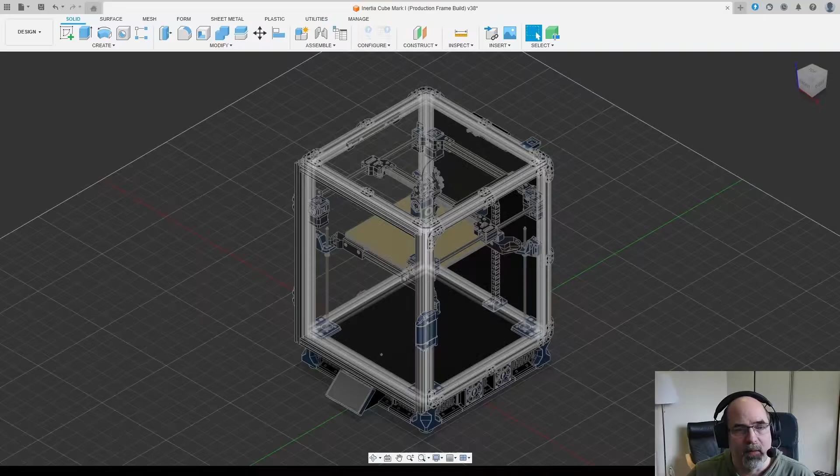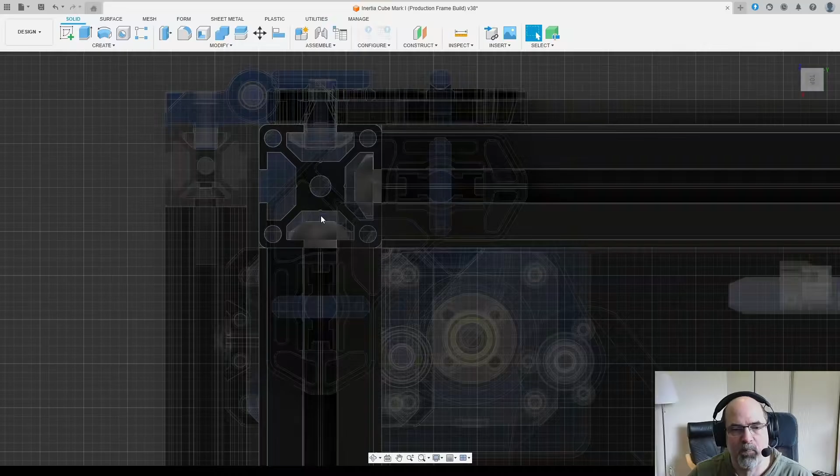Let's have a look at the frame. So for the frame, we're leveraging 30-30 extrusions for the external frame. The 30-30 extrusions give us lots of space around the blind joints to route wires down the extrusion slots. And if you go down the vertical extrusions, you get to run wires from the very top of the printer all the way down to the very bottom into the electronics bay. So you can get wires all the way down by running them through this extrusion slot.

And this gap here is all empty space. So there's room for at least 5, 6, I think I've run as many as 8 wires in that space if they're small enough gauges. Running wires in the extrusion slots is very nice from a visibility perspective. You can easily hide all the wires behind some extrusion slot covers.

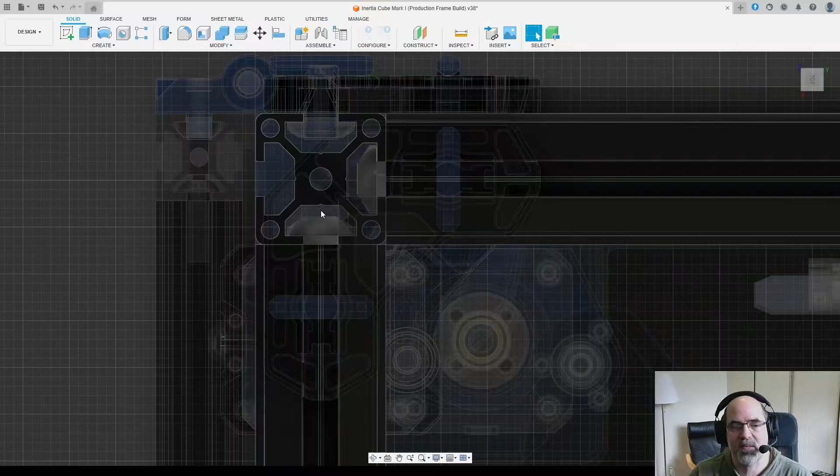However, it might not be optimal from a serviceability perspective in case you're constantly fiddling with your printer or rewiring things, or in case you have to service it for something later on. Admittedly, that's a bit of a trade-off. So although I will be routing my wires through the extrusion slots, you do whatever makes sense to you. We will have alternative wiring paths that you can leverage instead if this isn't something you want to go through.

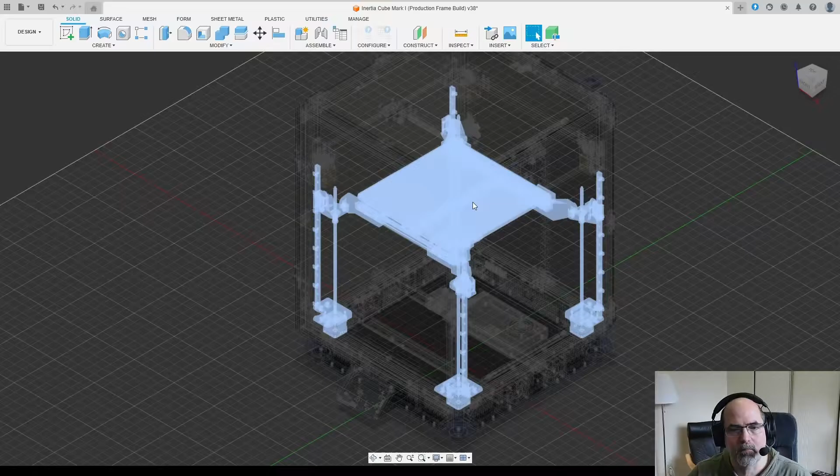The Z-axis, we have a few different things going on here. So the Z-axis is an example of a component where we have, let me just try and get the right view here. We have these fixed parts on the outside, so the lead screw motors. We're leveraging 4 lead screw motors in each of the corners to provide a quad gantry level bed leveling algorithm. And so the lead screw motors are attached via Z-joints.

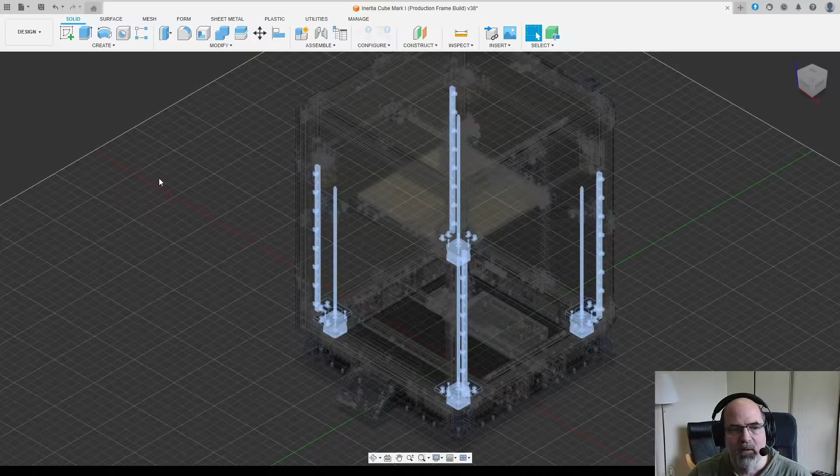The CAD is organized such that if there are static parts that don't move relative to the frame, then they are in a static parts folder, and kind of all of the assemblies from there. In each of the different sections, you'll see non-printed, so that would be fasteners, hardware you'd have to buy, such as the motors themselves, fans, electronics, et cetera, and then printed. So printed is all of the plastic parts that you'll print on your printer in order to finish the build. So you can quickly go through the CAD and look at all the printed folders in each of the sections, and they could be nested down the tree depending on how this is organized.

And then when we look at the printed parts folder, let me just give another example here with the monolithic gantry. There's a few things about parts that you might want to know. This is a bad example, but if there is an X at the end of the part name with a number at the end, that means print that part that many times. So X4 would be print 4 copies of that part.

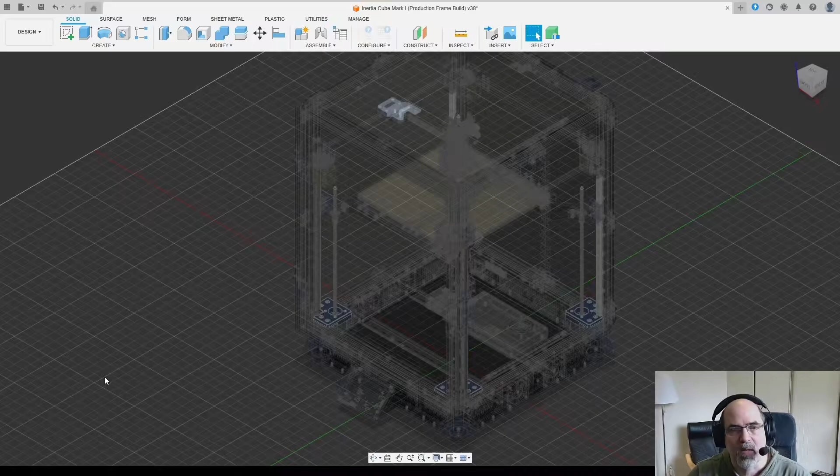If there is a D in parenthesis at the start of the part name, that tells you that the part is designed with dual color printing in mind. If you have access to a dual color printer and you want to export it and print it in dual colors in your slicer, then you can absolutely do that. If you don't or don't want to, you can obviously export it and print it as a single color part. That is fine, but there is, in this example, a logo that is hard to see in this view. Let me see, there we go, I can pull it up that way.

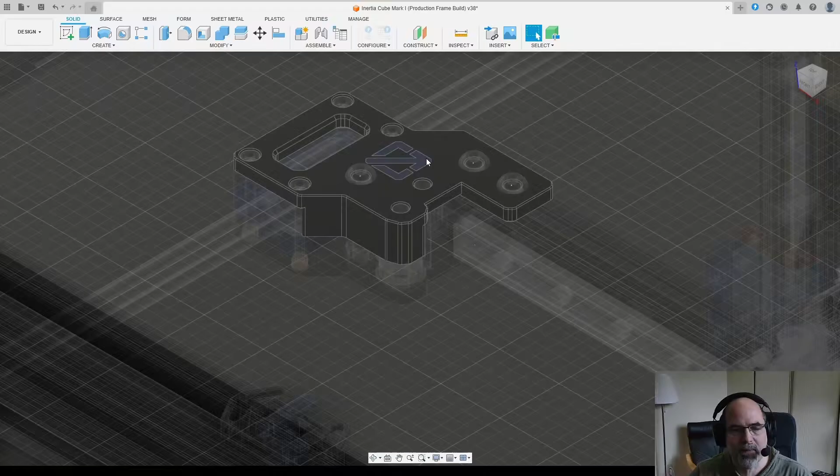So this blue logo is our Inertia design logo. The arrow faces up and to the right. And so that logo is in blue on the black background part. Our design choice for color scheme is black is the primary color and blue is the accent color. Obviously, you do what you like. My personal printer is my traditional purple and sky blue color theme, so I'm going to vary from this, but this is the model and color scheme that we've gone for as a team.

Where you see a printed part that has an A in parenthesis, then that part is intended to be printed in the accent color, so just a single color part, but in the accent color rather than the primary color. And otherwise, if the part name does not have anything in parenthesis, then print it in the primary color.

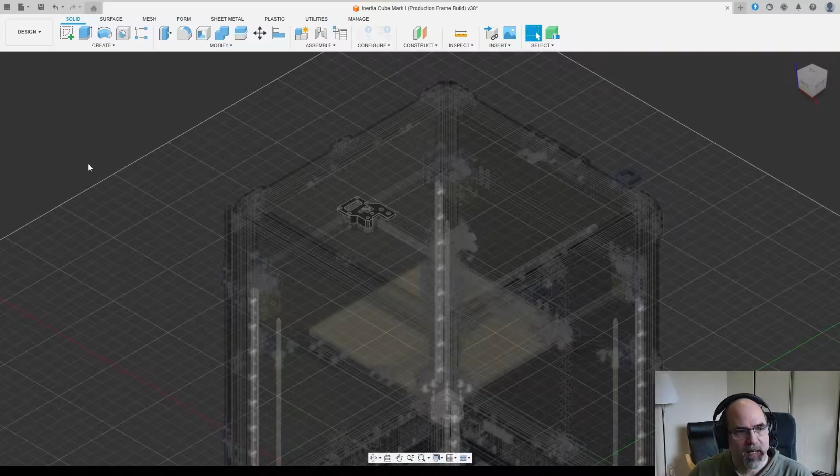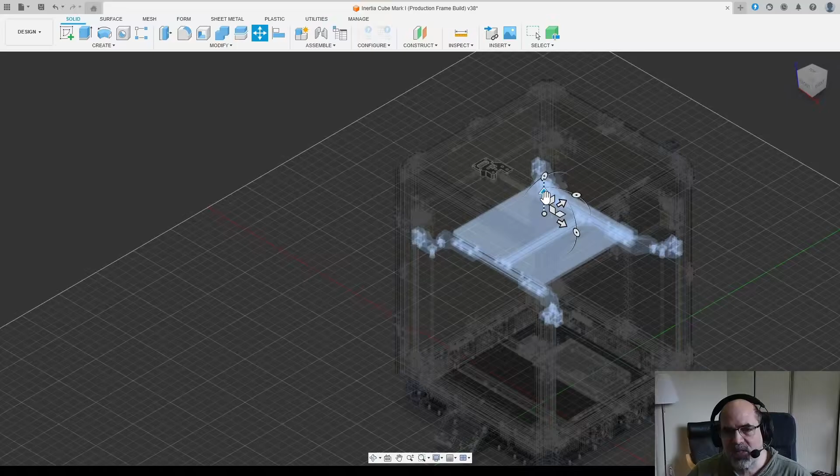Another thing about the axes, and I'll start with the Z-axis, for example, we have this concept of static parts, which don't move relative to the frame, and motion parts or moving parts. Moving parts is anything that has physical motion as the printer motors are engaging. So in this case, the bed can slide up and down, and I implemented this as a separate selectable group, that component, so that I could very easily check for collisions with other assemblies in the printer. So it allows me to easily figure out range of motion of the parts just from the CAD model. And I do that for all 3 axes, the X, Y, and Z axes.

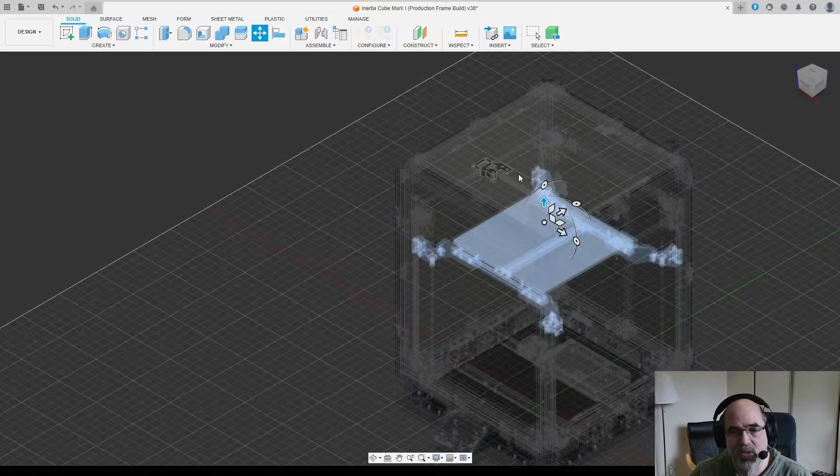So we can very easily look for things like tool head collisions into the XY joints or into the motor mounts in the corners. And wherever you see moving parts, so you see it here and also here, for example, if I select the Y gantry, I can just move, this is the Y gantry, so this is, I lie. This is the Y gantry. So this is the entire gantry that can slide back and forth. And then let's just go back to 0 here.

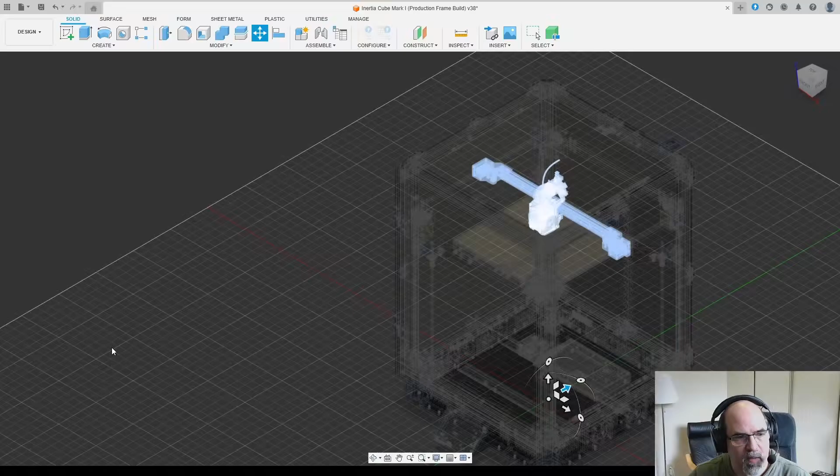Similarly, within here I have the X-axis, and that allows me to slide the tool head left to right through that axis. So if you're designing a mod for the printer, I heartily recommend that you design your mod in concert with the full CAD so that you can very easily check your mod to be sure it fits within the build space and doesn't collide with any of the other assemblies.

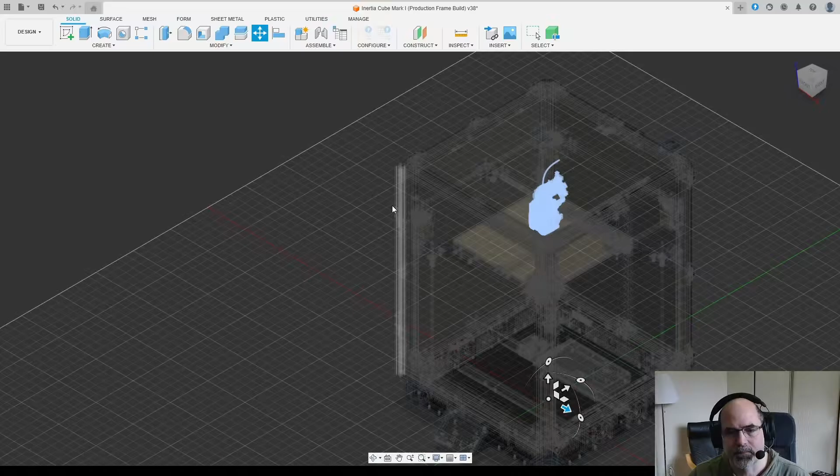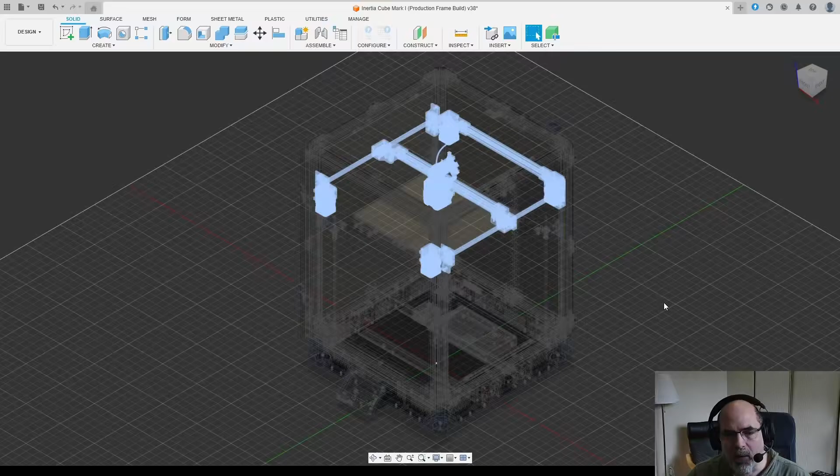All right, while we're looking at the gantry, let's move right along to that. The gantry is based on Cloaked Wayne's monolithic monolith gantry mod that he originally released for the Voron printers. We have Cloaked Wayne's blessing to leverage his gantry design. We've taken his design and modified it for our own requirements and needs.

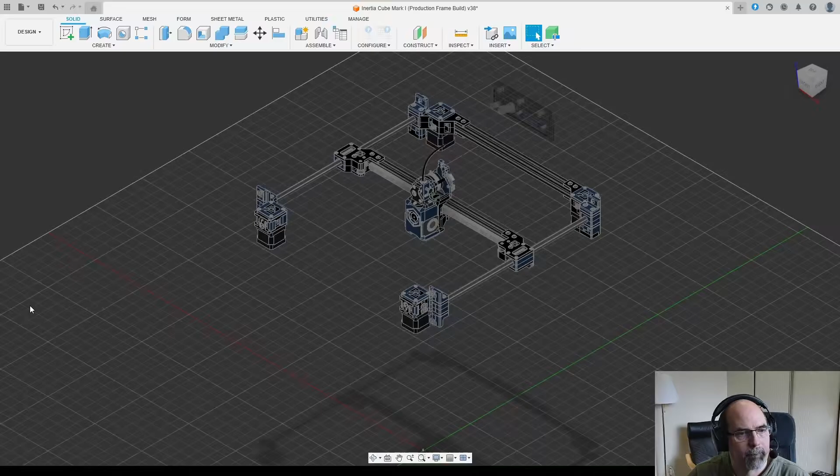A few things about the gantry design. Let me hide the panels here just for now, to give us a bit more clarity and visibility into this. I'm just going to turn everything else off for the moment. Okay, so with the gantry, we have a few things. The front motor assemblies have double shear motor plates. The motors are bottom mounted and the shafts are 35 millimeters. There is a flange bearing underneath this double shear plate that helps keep the motor shaft from being pulled, warped or bent when you're tensioning the belts at high tension.

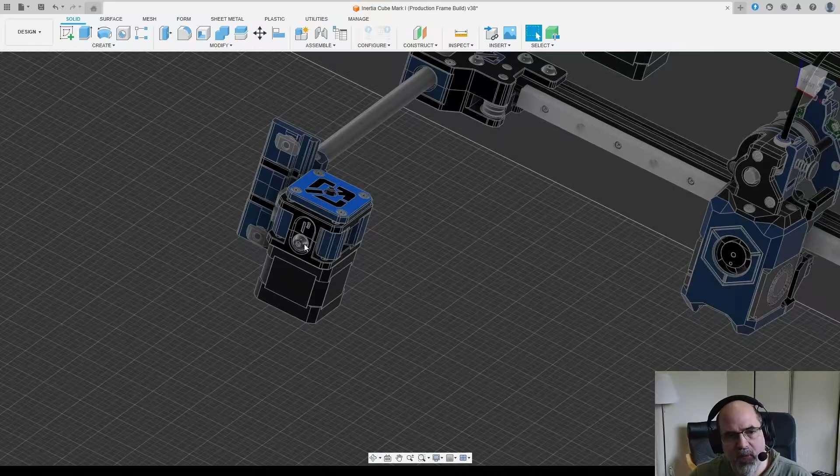We have this front tensioner adjuster for the bottom belt, and on the right side, the same idea for the top belt. This M5 bolt is how you adjust the tension for the bottom and top belts, and you simply tighten them. The entire motor and tensioner assembly has 5 millimeters of travel in the Y-axis, so that gives you some ability to tension the belts. If the tensioner assemblies are all the way back, they're loose, and as you tighten this bolt, it pulls the tensioner assembly forward, adding more tension to the belts.

By default, we want the belt tension while the tensioners are loose to be pretty snug and tight. You'll see in one of the assembly videos, we have a belt puller tool to help cinch the belts on one side of the carriage part and then pull them both tight evenly through the other side. So we want a good amount of tension on the belts. I can't tell you in pounds of force or newtons, but I'm fairly certain it would be considered high tension in some other builds, and we're getting really good results with that. So that's the front tensioner assemblies, and there are no other tensioner assemblies within the belt pathing.

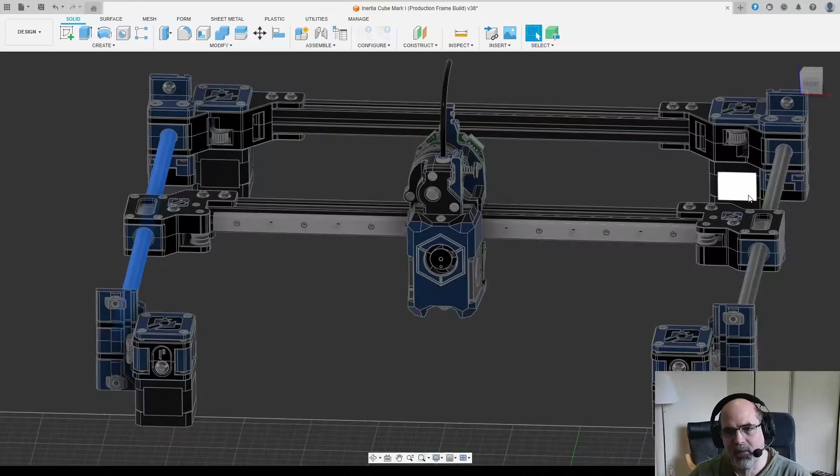In addition to the quad gantry with the monolith rails, the other elephant in the room with this build is these linear rods. I don't have a good design or engineering reason why we chose linear rods. Some other successful commercial builds leverage linear rods in one or more axes, so we thought, let's see what happens. These are M12 stainless steel rods with an LM12UU bearing on each one. The bearing is captured by the XY joints, and that is how we handle our Y-axis motion.

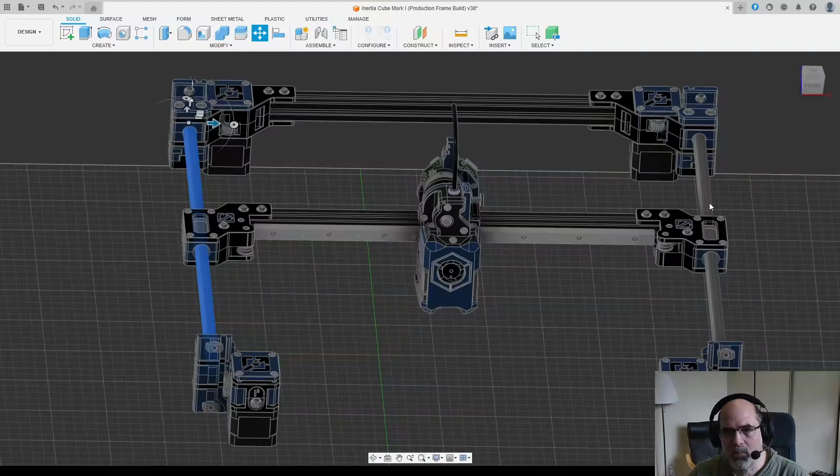Also, if you loosen or remove 8 bolts, the 2 at the back here, the matching 2 on the front assembly, and the 4 bolts on the XY joint that capture the bearing, you can slide the entire rod and bearing assembly out to the left for relubing, replacement, or any kind of service required. So it's very easy to disassemble parts of the printer for servicing without undoing everything. All of the motor mounts are independent in the corners, other than the belt routing, so you want to be careful of that.

So, linear rods, 12 millimeter linear rods, rather than extrusions and linear rails. Why? Good question - something to try just to be different. Has it helped? I think so. Do I have measurable results to confirm that it helped? No, they are subjective results, but I'm really happy with the design and build so far. This has been by far the easiest printer for me to build, and I've built a few on this channel.

We're getting really great performance results. With this gantry, between the monolith rails, the monolith belt routing, the Y rods, I am also leveraging an MGN12 linear rail for the X-axis, and the Z-axis is also using MGN12 linear rails. My X-axis linear rail is a Berserker rail from West3D, so thank you to Dan and the team at West3D for that - the Berserker rails have always given me really good performance in my other builds, and that's what I have for my X rail.

With this configuration, and with the stability that the 3030 extrusions give to the frame, I'm easily able to achieve, without much tuning effort at all, using input shaper kind of results to gauge success, belt similarity tests in the high 90s - 98, 99%, 99.8% I think was the best I achieved - for belt similarity tests using input shaper, or using the ADXL to measure belt similarities. And I'm getting easily 18,000 to 20,000 recommended accelerations on both X and Y.

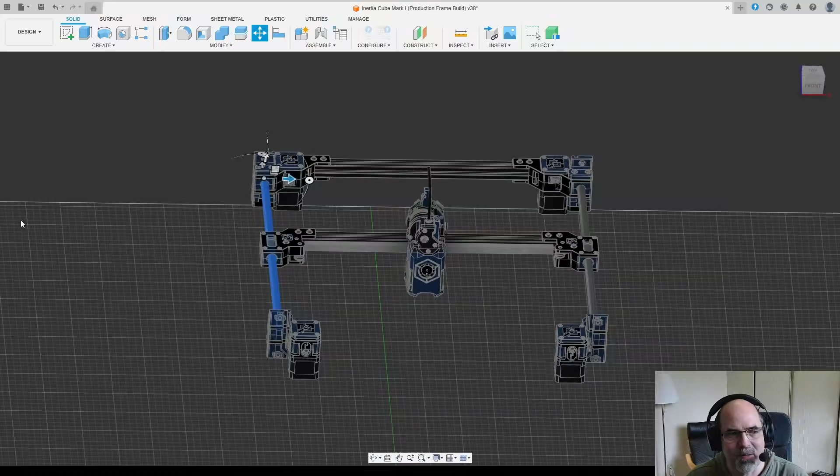All right, let's talk about the tool head.

So our tool head is comprised of two plastic parts. The first plastic part is what we call the main body, which is the front plastic part, the traditional tool head. The second plastic part would be the carriage plate, carriage adapter. This carriage is designed for the monolith belt routing, which means that the belt teeth face to the rear of the printer rather than to the front of the printer, as is typical with a Core XY belt routing. The main body, the front of the tool head, is a single plastic part, so there's no assembling of multiple parts.

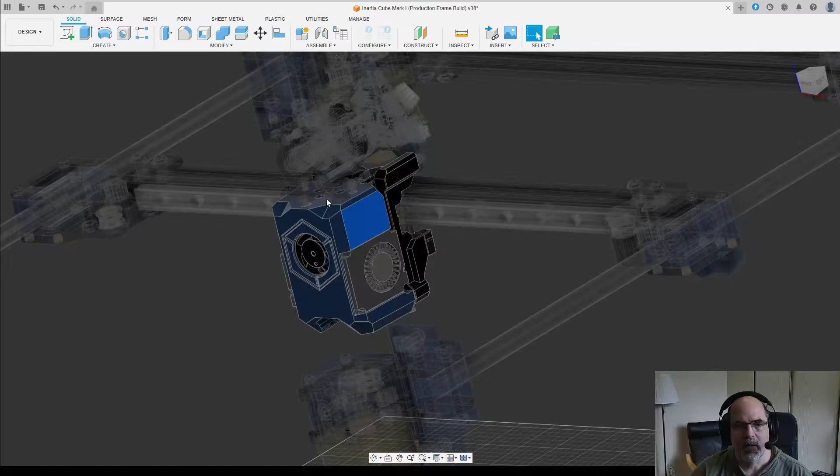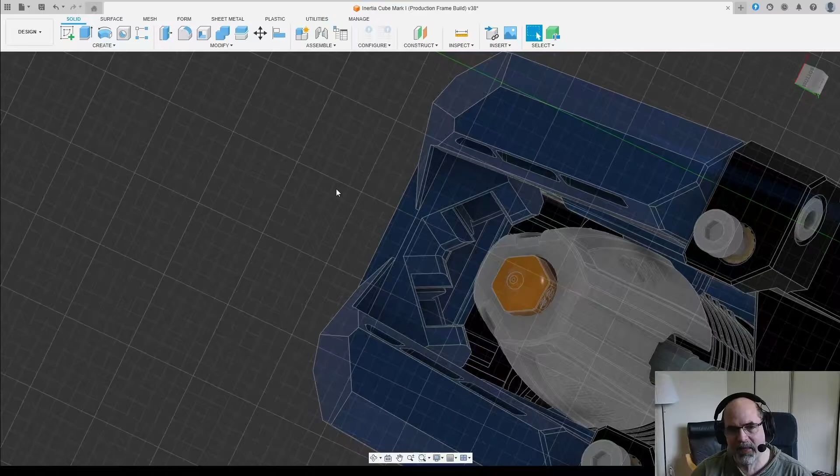The hot end bolts right into this plastic part, as does the 25 by 10 hot end cooling fan and the twin 4010 blower fans. The hot end main body also has - let me see if I can get it from underneath here - mounting slots for a couple of NeoPixel PCBs. If you have the single NeoPixel PCBs from like a Stealthburner build or something like that, those can slot right in here.

The carriage part has two bolts to attach an eddy current scanner to use as a bed mesh scanner, and also for your Z probe.

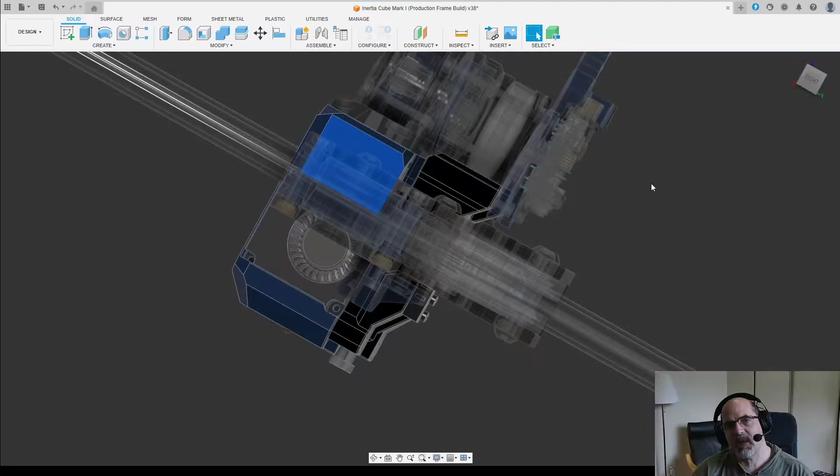So whether you use a USB toolhead PCB such as a Nitehawk 36, or a CAN bus PCB such as an EBB36 from Big Tree Tech - and the Nitehawk 36, obviously, from LDO. If you're going USB, I'd recommend a Nitehawk 36 plus maybe a Beacon over USB, or if you prefer, a Cartographer over USB. If you're going to be using CAN bus, then I'd recommend a Big Tree Tech EBB36 for the toolhead PCB, and a Cartographer probe for the eddy current scanner, over CAN bus.

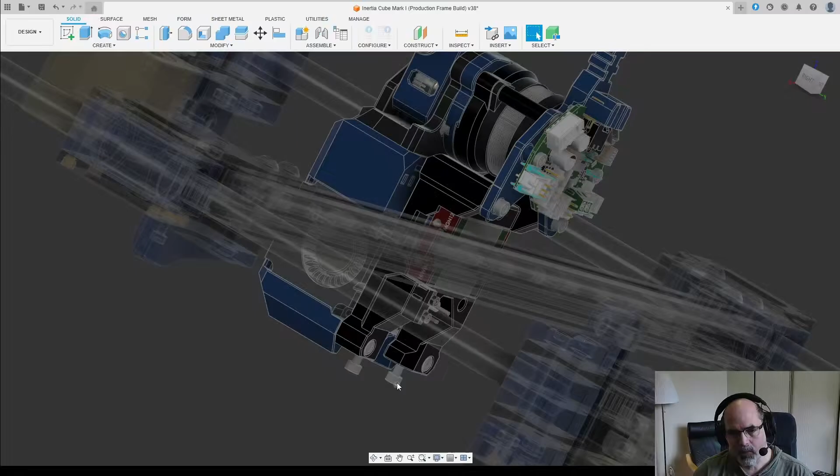Sorry about that, having some congestion issues here, getting over a cold.

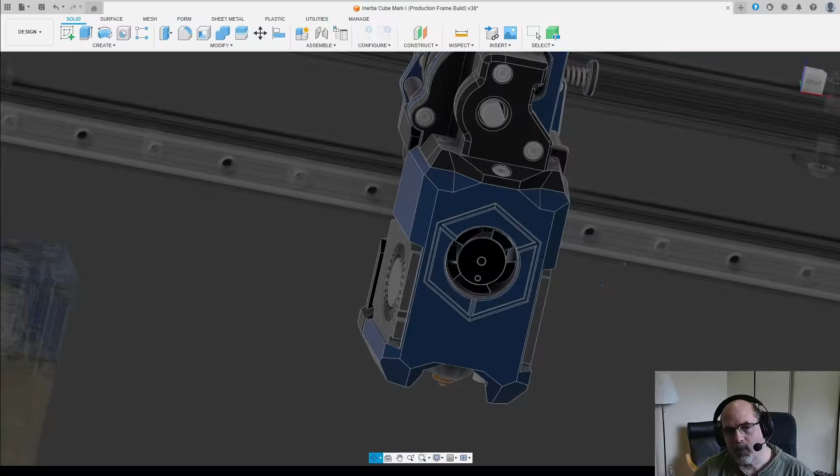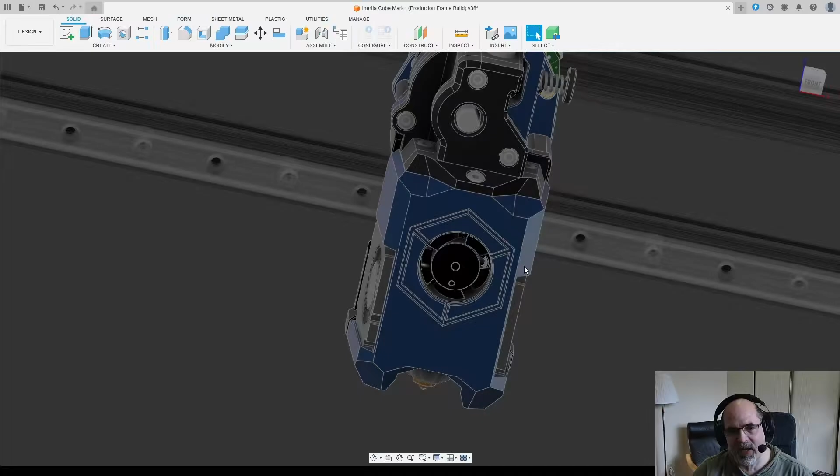So yes, the tool head is designed, heavily influenced by Chirpy's excellent Yavoth one-part tool head. We really like the concept - we tweaked it a little bit, made it our own, made most of the walls thicker, and adjusted the overall aesthetic to fit what we were looking for. But it's heavily inspired by Chirpy's designs - Chirpy, you may know better from his Rapid Burner and Dragon Burner tool head designs. The Yavoth was a less publicized design of his that he allowed us to remix for our needs.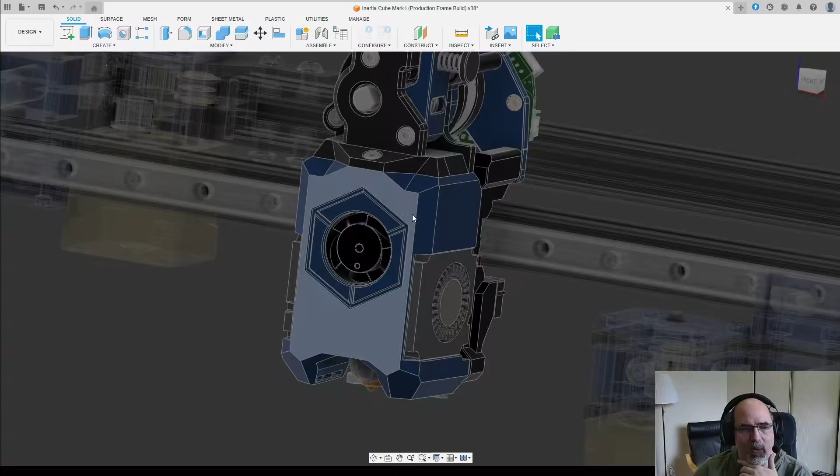And we're quite happy with the performance of this - it's a very rigid tool head. Given that it's only a single plastic part, it's actually very chunky, as is the single part of the carriage. The tool head itself, you'll notice, has no front accessible bolts. So the tool head main body is bolted to the carriage plate via 4 bolts on the rear. Let's see if I can bring those into focus here.

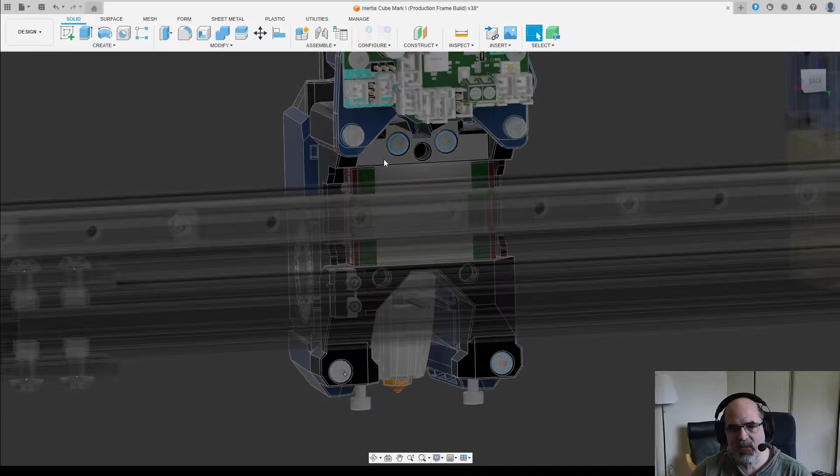It has 4 attachment points: 2 up top in the middle, and 2 down below. Because the carriage plate is a single part, and the tool head is a single part, that makes this stronger and more rigid than any other tool head I've built in the past, and simpler as well, because there are fewer parts to fiddle with.

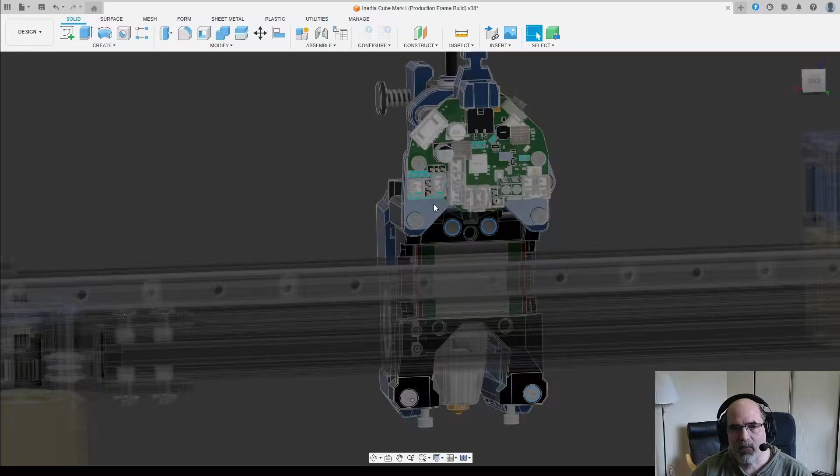Removing the tool head main body is very easy. You just remove these 4 bolts. And if you also remove these 2 bolts that attach the toolhead PCB mount plate to the carriage plate, you can lift the entire toolhead, extruder, and toolhead PCB assembly straight up off of this and pull it away for servicing or disassembly or whatever you need to do. So that's a toolhead in a nutshell.

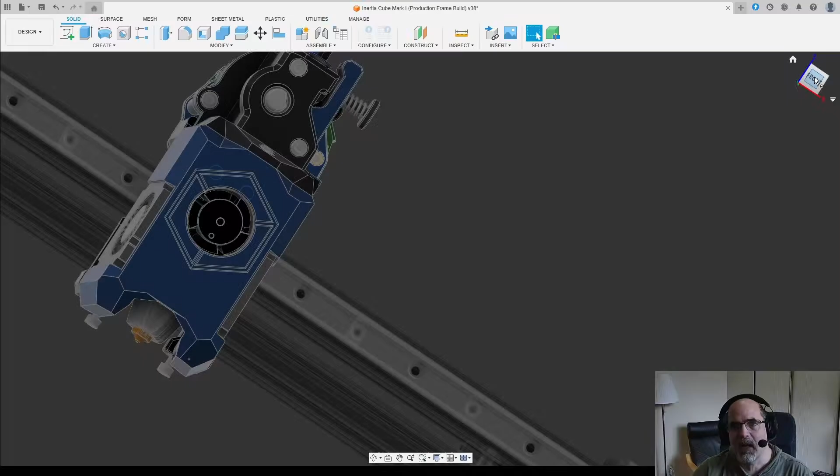So thank you to Chirpy for his excellent design in Yavoth, which is a great inspiration for us in making it fit our needs and requirements.

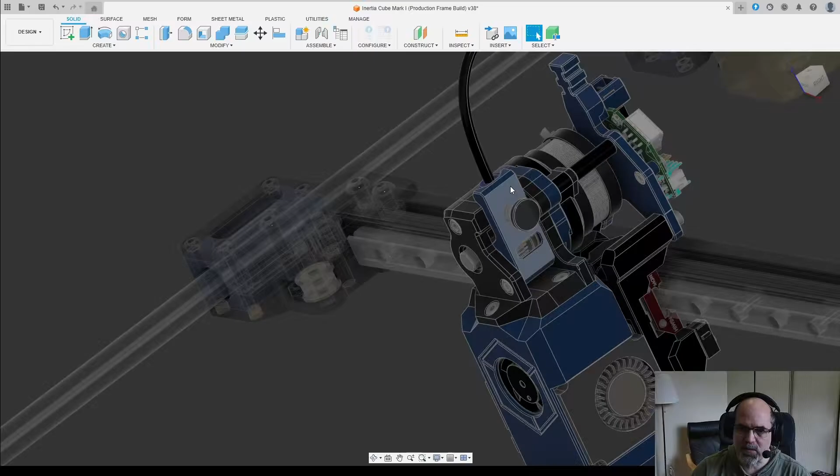Onto the extruder. The extruder is, again, a hodgepodge of two different designs. The back end leverages the excellent work by Jared C. in the Voron community for his Galileo 2 standalone extruder, using that motor and the planetary gear set, married with the front gears of an LDO Orbiter 2 gear set.

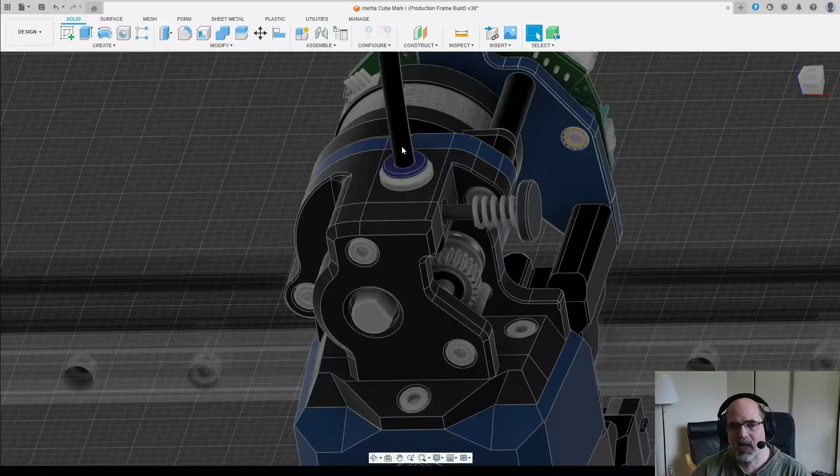So it's a mixture of the two. We've changed the aesthetics to fit what we're looking for, and we've given ourselves an ECAS to capture the PTFE tube for the filament. This has proven very good for us.

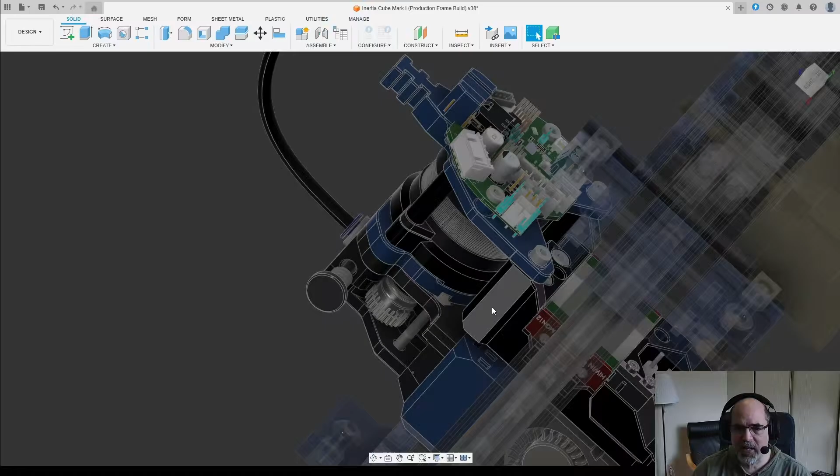The 3 bolts that attach the extruder to the tool head provide a nice stable platform when combined with the 2 bolts that connect the tool head PCB plate to the carriage plate. You get a very stable, rock solid tool head that doesn't feel flimsy at all.

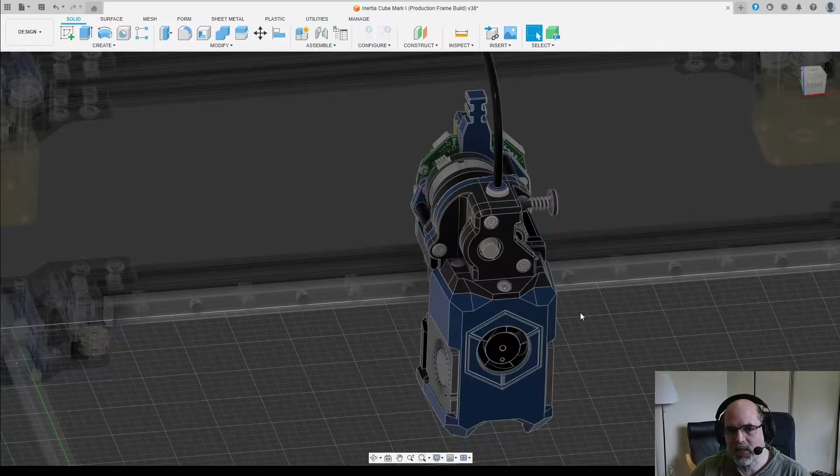Although it feels very solid and doesn't shake, it doesn't have a lot of weight to it. It's relatively light. I forget the exact weight, but it was on par with a Dragon burner, maybe a Rapid burner, when we did comparison weights. So despite being very rigid, we're not adding any additional weight to the X gantry. So that's good.

So there we go, a new tool head and extruder design to complement the monolith gantry, and that's been working very well for us.

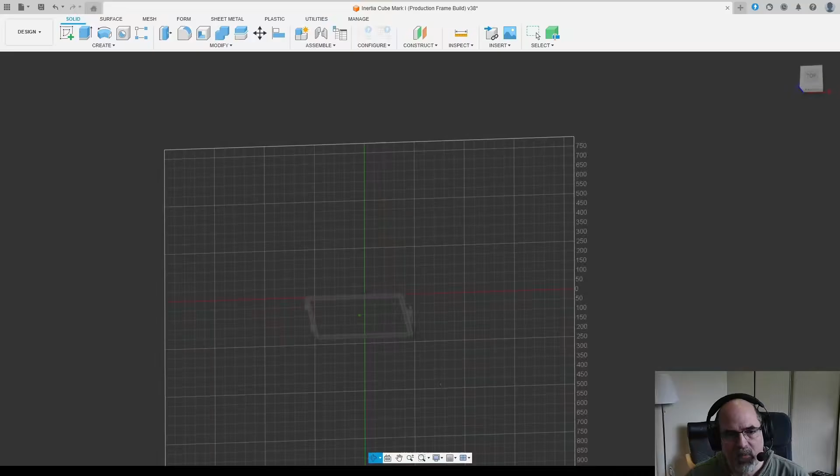To complement the frame and the panels, we have the fridge door, as we're calling it. It's in fact a Clicky-Clack door, which was made popular in the Voron community by WhoppingPochard—I apologize if I'm mispronouncing that. Whopping, thank you for all of your many designs and mods over the years with the Voron community and others.

This is one of my favorite door assemblies now. I have it on a couple of printers, and I am installing it on more.

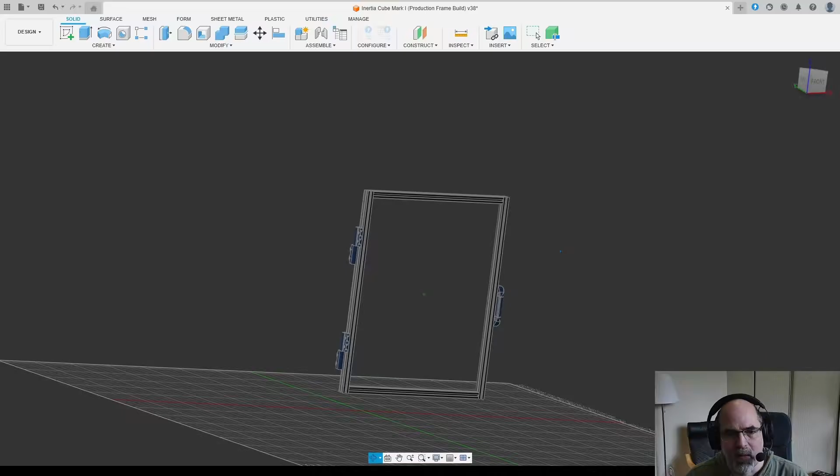We decided we liked what we saw, so we're leveraging it. We had to modify a couple of things because parts of the hinges and the latch plate need to fix into the 30-30 extrusion of the frame rather than the door extrusion. So we made some tweaks to fit our particular build, but by and large this is Whopping's design without very many modifications. Thanks to him for all that he does for the community.

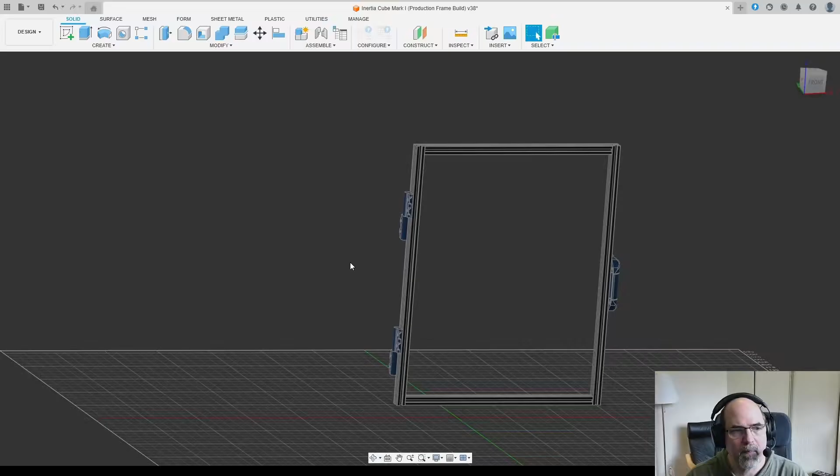Electronics aren't fully fleshed out yet. Because we have 4 Z motors and 4 gantry motors, you need at least a main MCU capable of 8 stepper drivers, which limits your options. We tend to like the Big Tree Tech products, but there are other 8 stepper driver boards you could leverage as well. We'll have configuration files available on release for the Octopus Pro 1.1, which has the H723 chipset.

We'll also have a Manta M8P v2.0 configuration available, as well as a Big Tree Tech Kraken. If you like to use other products from Fysetc or other manufacturers, as long as it has 8 stepper motor drivers, you should be set and ready to go.

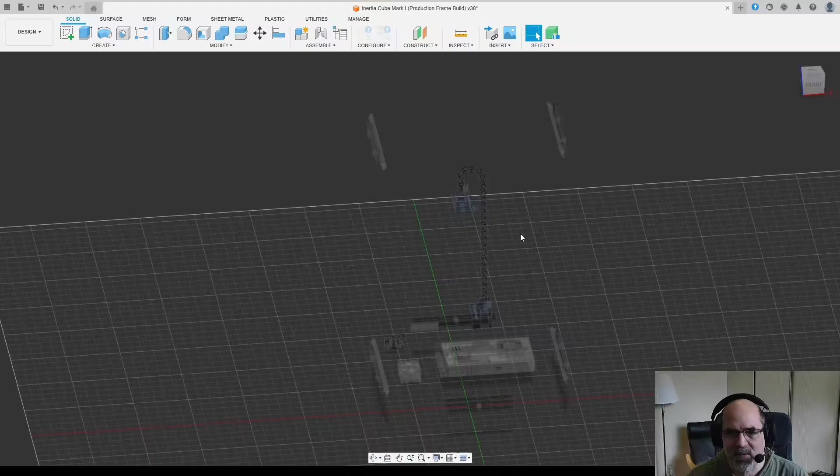This initial build is leveraging only a 24 volt power supply. You could obviously break it out and use 48 volts if that's your wish, or even 60 volts, provided you have the appropriate safety precautions and the right electronics hardware to handle those higher voltages, such as stepper drivers and appropriate MCUs. But initially, the base build will only leverage a single 24 volt PSU.

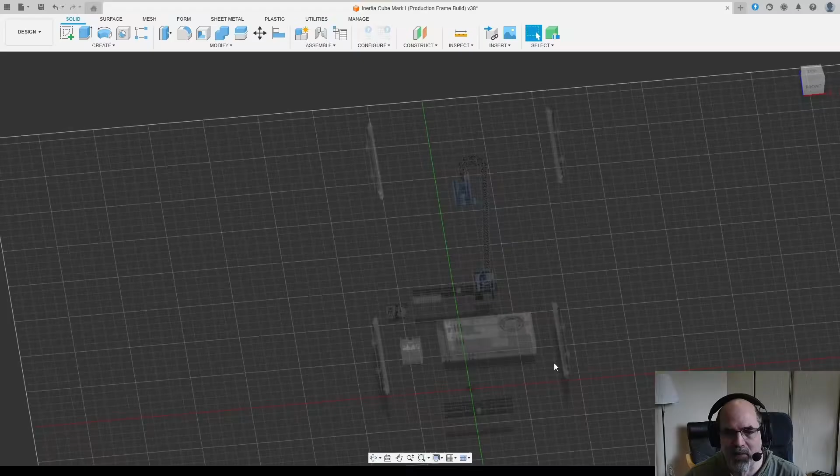What else can I say about the electronics? We do have lighting provided in the build by either daylight or disco on a stick PCBs. It's an excellent design, means much less soldering for Steph, and Steph hates soldering, so I personally thank you very much for that. We leverage two of them at the top of the build space, and if you want to bling out the electronics bay, you can install two more daylight or disco PCBs there to get some underglow effect through the skirts.

Panels. So let's talk about panels for a second. They're nothing special. We have the top, the side panels, and the front door panel, which are all intended to be transparent, clear. I like to get mine made out of polycarbonate, but acrylic works fine.

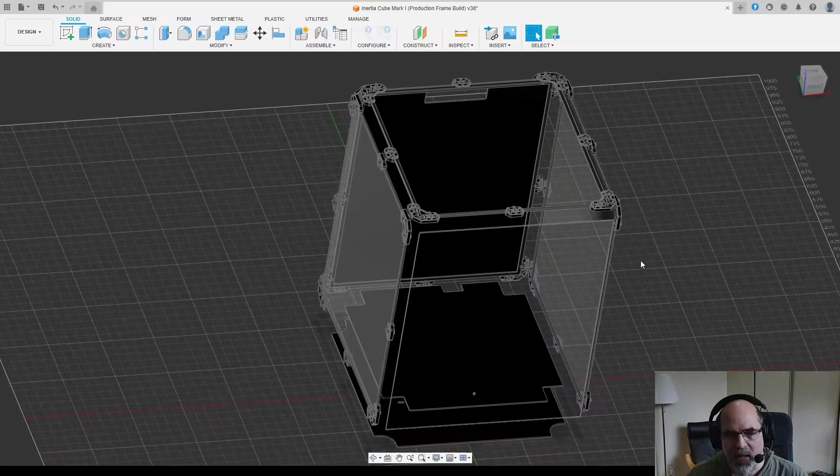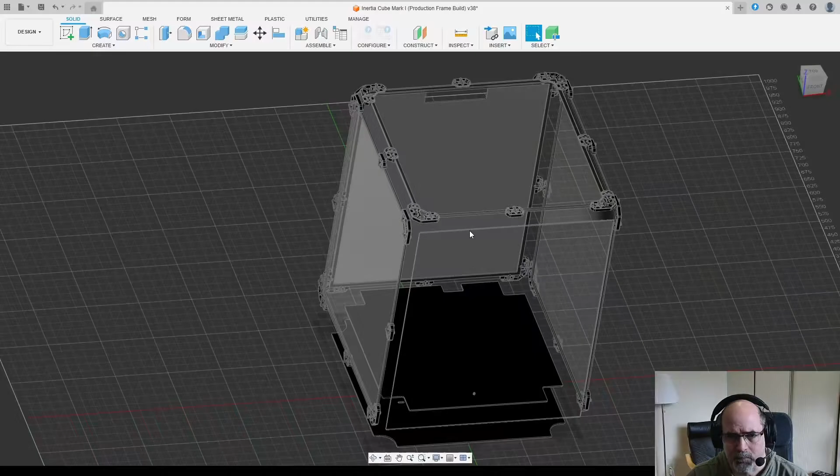The rear deck and bottom panels are intended to be opaque, and I usually get mine made out of ACM. I like to use my good friend Sean from Happy Manufacturing. He's the guy I go to for all of my custom panel work, and he's able to not only cut panels to size but also install a vinyl sticker or decal onto one or both sides of the panel so you can have a design represented, similar to what you'd see with a Cricut. Links to Happy Manufacturing will be in the video description below. Do reach out to Happy, he's a great guy, does great work, and I really appreciate all the help he's been with my panel acquisitions for all of my printer builds.

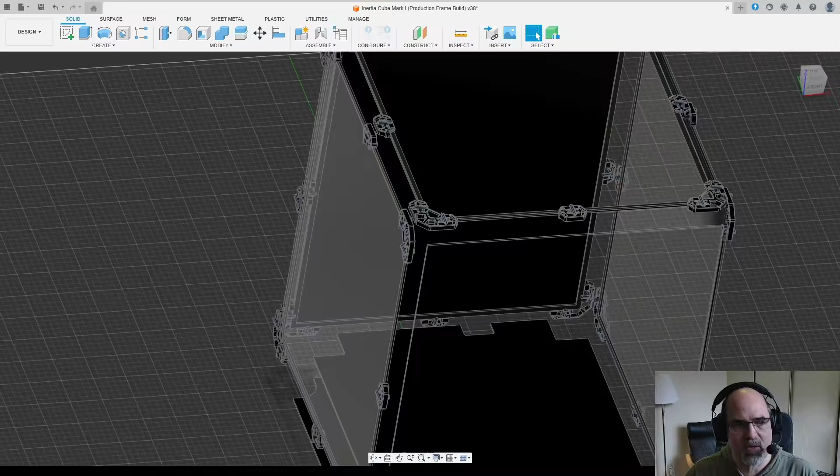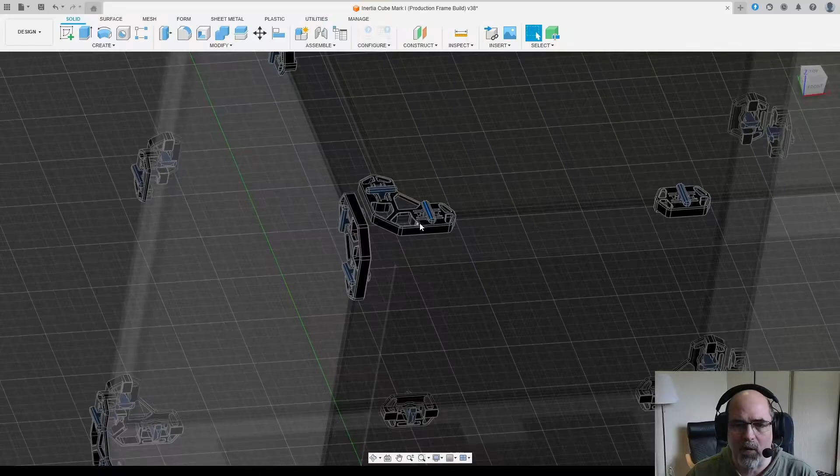In addition to panels, for fixing them to the extrusion frames, I've always really appreciated Ann Lin from the Annex Engineering team. Ann Lin has what I think is a really excellent design for panel clips, because they're all printed plastic parts. They don't require any double-sided tape or VHB tape, and they don't require any fastener hardware to affix the panels to the extrusion slots. You simply rotate these blue keys 90 degrees, two in the corner, one on each of the middle parts. Once you rotate the keys so they're running parallel to the extrusion slot, you can remove the panel clip directly. Once all the panel clips are removed around a panel, you can easily slide the panel off the appropriate face and set them aside in case you need to remove panels for servicing, or if you just want more ventilation when printing in other materials.

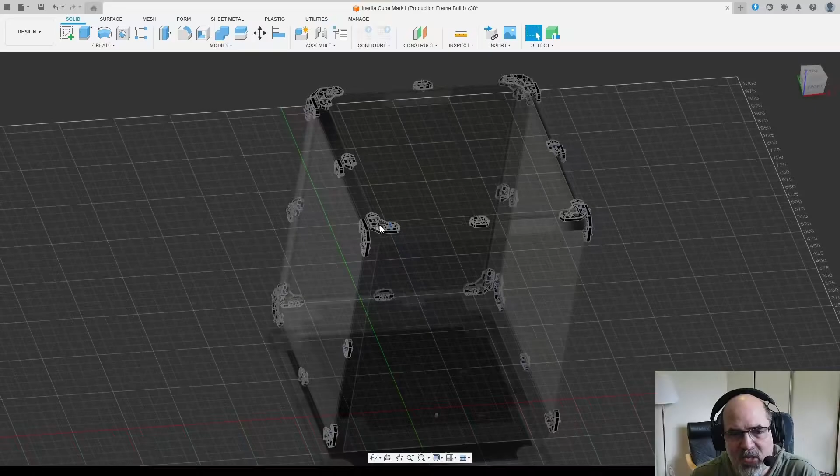These particular keys are designed with a 5.5 millimeter gap between the top of the panel and the inside of the extrusion slot. That 5.5 millimeter gap means that a 3 millimeter panel with 3 millimeter foam cover will get compressed by 0.5 millimeter when you lock these panel clips in place. So you get a nice seal of the panel against the extrusions.

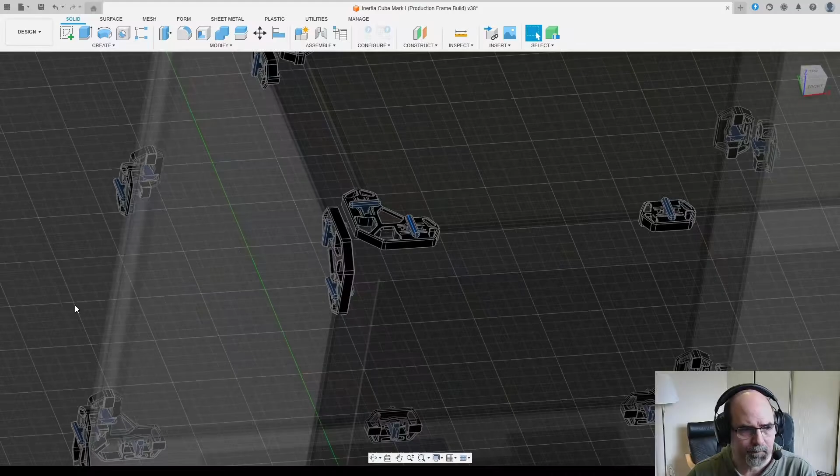That's it for the walkthrough of this build. So let's just put it all back to the way it was.